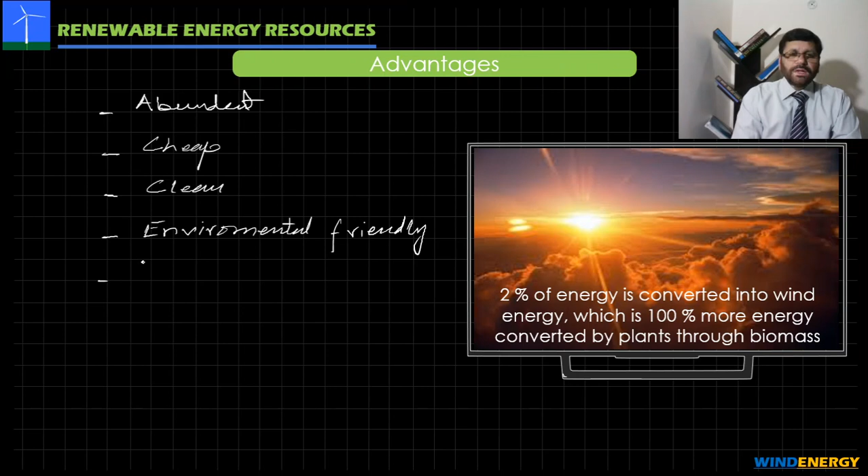Then it is cheap, you don't have to pay the recurring cost. Then it is clean energy and environmentally friendly, causing no pollution. However, one of the limitations, that is initial cost, is very high.

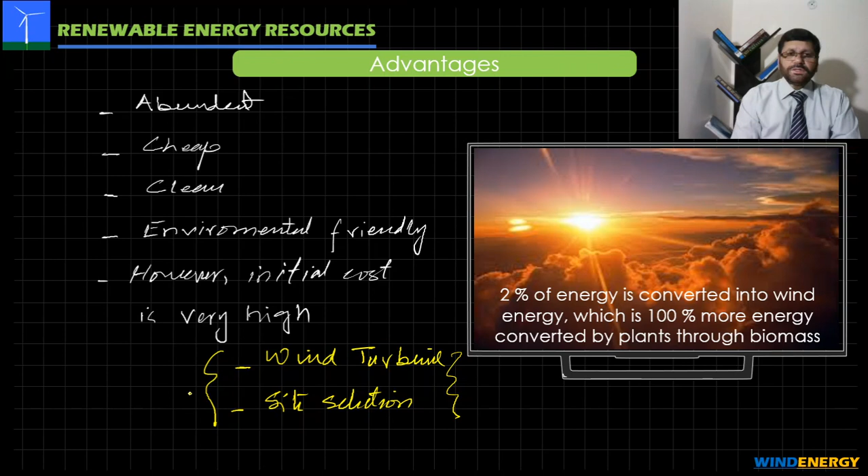And this initial cost is in the form of the manufacturing or making of wind turbines, and the cost associated with the site selection for the wind turbines. So this is very high, after that it is cheap. Now few environmental concerns in that. The first one is that

electromagnetic interference. It disrupts the frequencies of TV and radio waves. So this causes the disruption, that is electromagnetic interference. Then is the noise, which is produced because of the rotating components of the wind turbine itself, the drive chain and the generator that is part of the wind turbine.

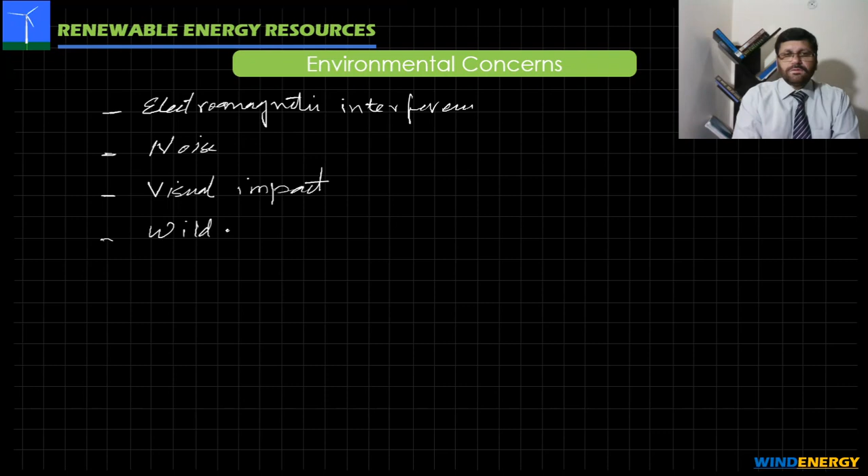Then is the visual impact, where the turbines are installed near the population, so the people feel that these are going to deteriorate the landscape of that very region. Then is the wildlife, that is killing of birds,

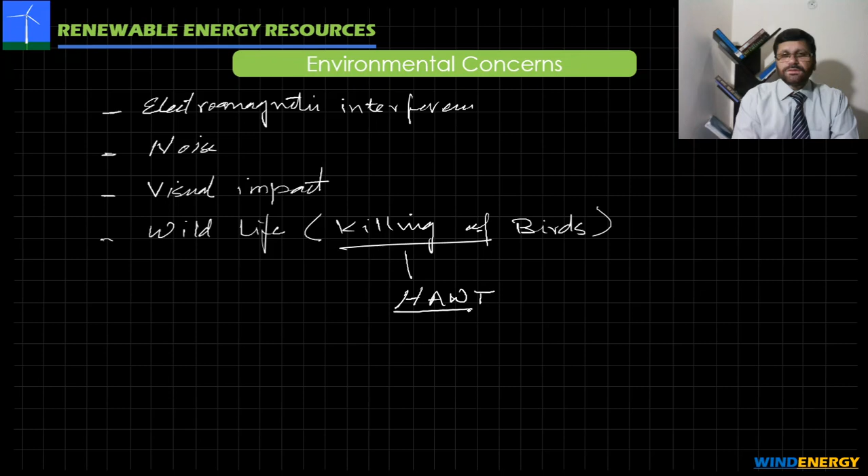and this is more associated with the vertical axis wind turbine. Sorry, this is more pronounced for the case of horizontal axis wind turbines, which we are going to discuss soon. Now,

wind drivers. Above the earth's surface, in the atmosphere that is present, these are known as the geostrophic winds, and here the temperature differences and pressure differences cause the wind to blow, the air that is moving. So we will look one by one. The first one, that is uneven heating of

the earth. The sun energy falling on the equator at 0 degree latitude is much more as compared to the North Pole and the South Pole. So what is happening? The air present on the equator warms at a much faster rate, and then because of the low density it moves upward. And after moving upward, it is going towards the North Pole and the South Pole. So this is one of the reasons for the blow of the wind, the wind driver.

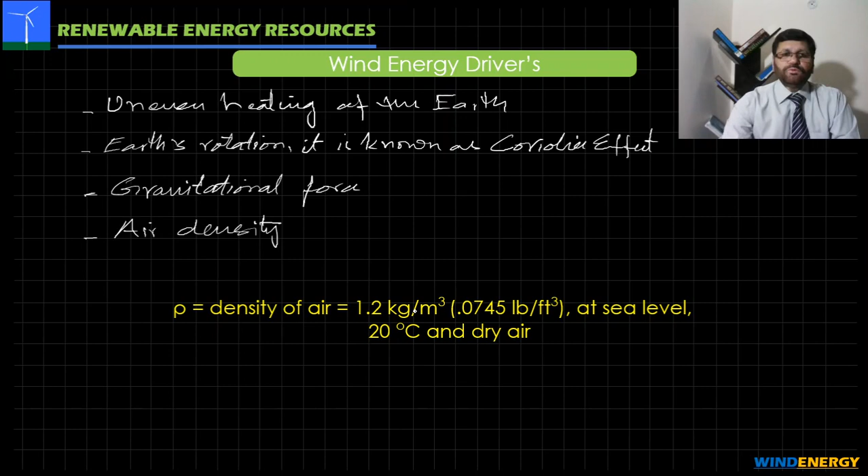Then there are the inertial forces. As we know, the earth is moving in its fixed orbit around the sun, so because of the attraction of the sun there are some inertial forces, so that is also causing the force.

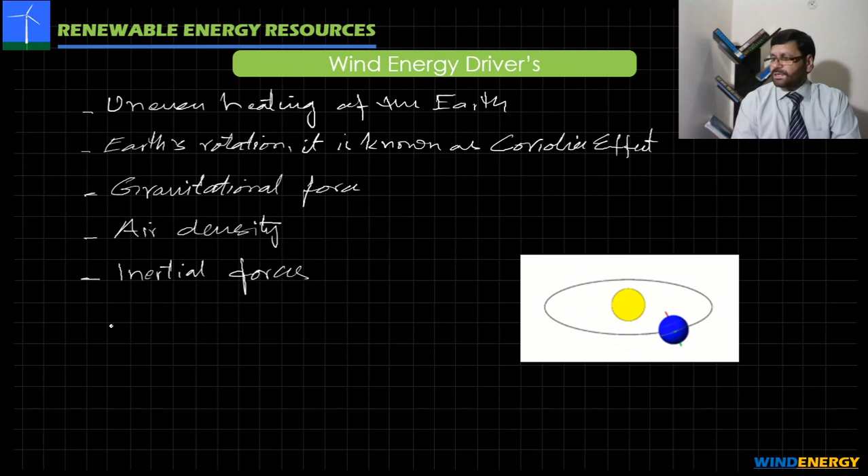Then we have the weather phenomena. We have seasons like summer, winter, spring, autumn, and because of that there is a seasonal effect, and due to this seasonal effect, the wind direction as well as the velocity, the speed, is going to differ. So this also causes the movement of the wind.

Further, the surface effect. Surface effects. In that, the first one is the topography: the terrain or the landscape of the very location which is under consideration. So this is going to affect the wind movement.

Then the mountain effect. In mountains during daytime, since the masses get warm earlier, the wind warms up and moves upward, and during night hours it tends to move downward.

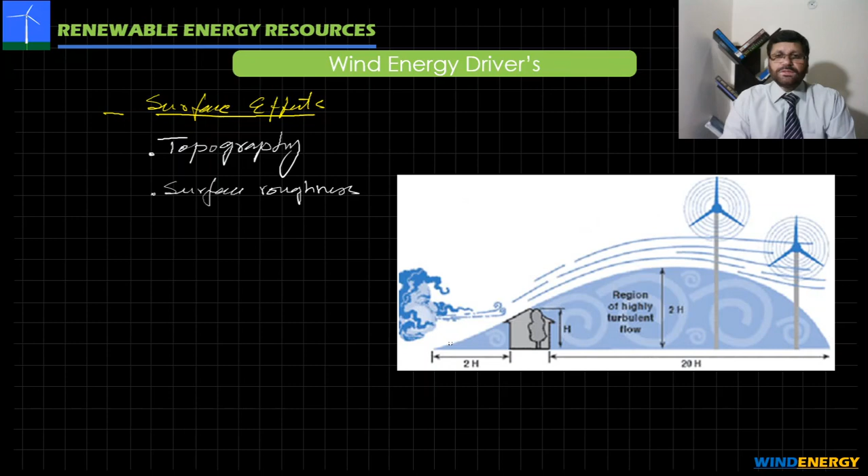So we say that the surface roughness at sea level is 0, and the surface roughness on the roads, on the runways, is going to be 0.5, and likewise for the built-up area this is going to vary. So this is the surface roughness that hinders the flow of the air, and air is going to move at a much slower velocity after striking these objects present on the surface of the earth.

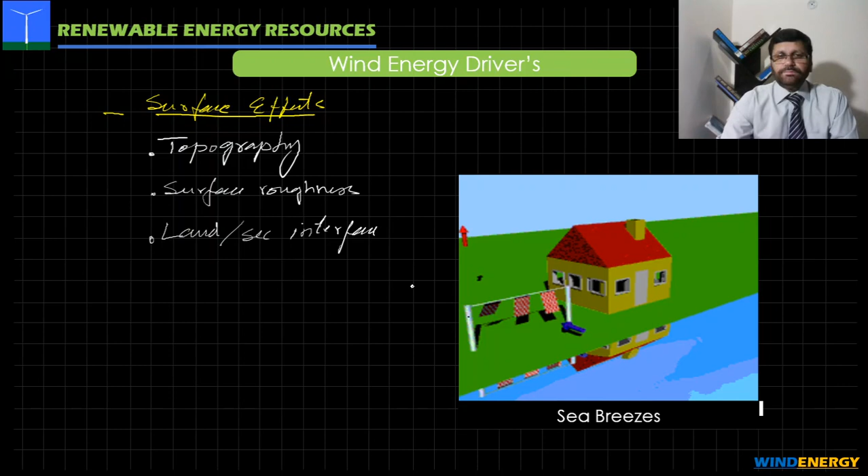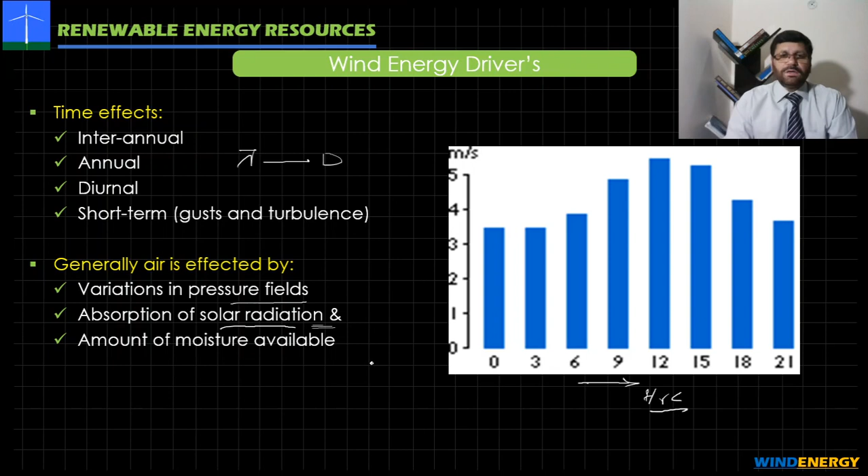Overall, we can say the air is affected by the variation in the pressure fields, caused by uneven temperature and many other reasons. Absorption of the solar energy will depend on the objects, the masses present on the earth, and then the amount of moisture available in that region. Then, overall, for the statistical analysis we have to get the wind data for the analysis, that is, the average horizontal wind speed over a specified time interval.

Then the variations in the horizontal wind speed, then the average horizontal wind direction. Because if you have at any location, let's say if I mark this location like this is north, south, east, west. Now this is going to indicate the direction of the wind at any point in time, what is the direction of that very wind. So wind direction and the wind's velocity, the speed and duration of distribution.

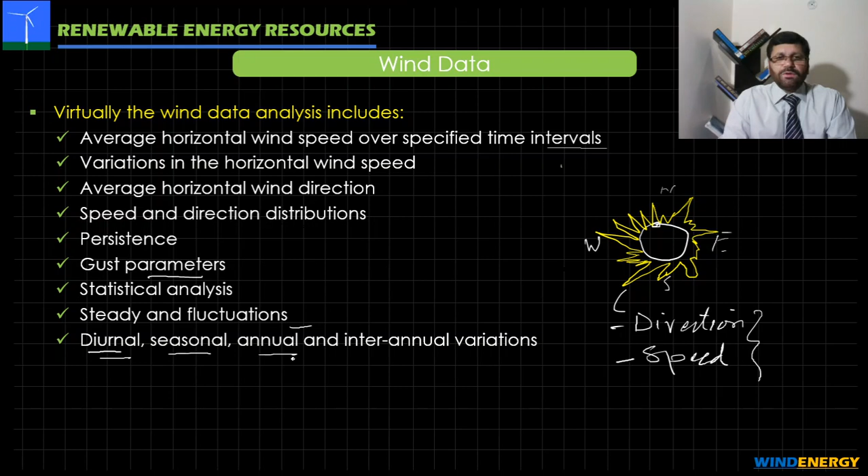So this is going to give us the distribution and, you can say, the direction as well as the speed of that very wind. Then the gust parameters, then statistical analysis on the basis of these measurements, then steady and fluctuations that we are going to expect, and overall these are going to be calculated on the basis of day and night, seasonal, annual and interannual variations.

Now these are the few instruments which we use for the measurements of the wind. The first one is the anemometer. The anemometer is going to measure the velocity of the wind, and it is very important that we place that anemometer at the location of the hub of the wind turbine. Let's say we have a 3-blade wind turbine, and roughly as a thumb rule, the height of the turbine should be 3 times the radius of the rotor, or you can say the radius of the blade.

Let's say if the blade length is 40 meters, so 3 times means we have to install this turbine 120 meters from the ground. So we have to place that anemometer at 120 meters from the ground. Then we use wind vanes.

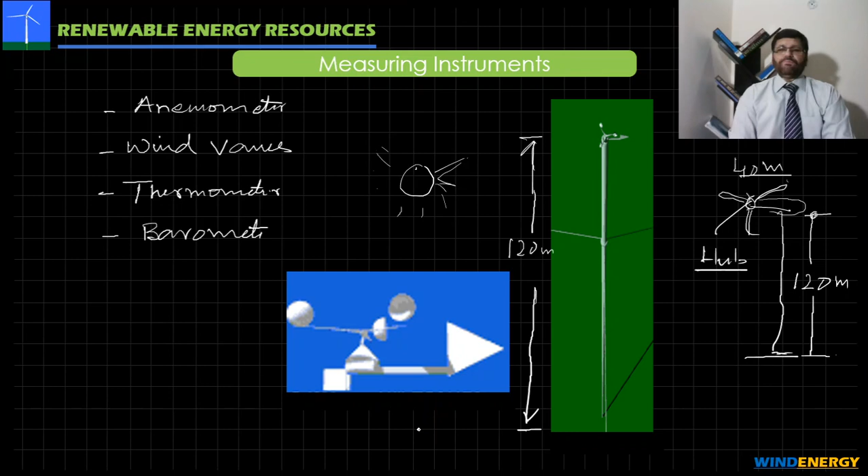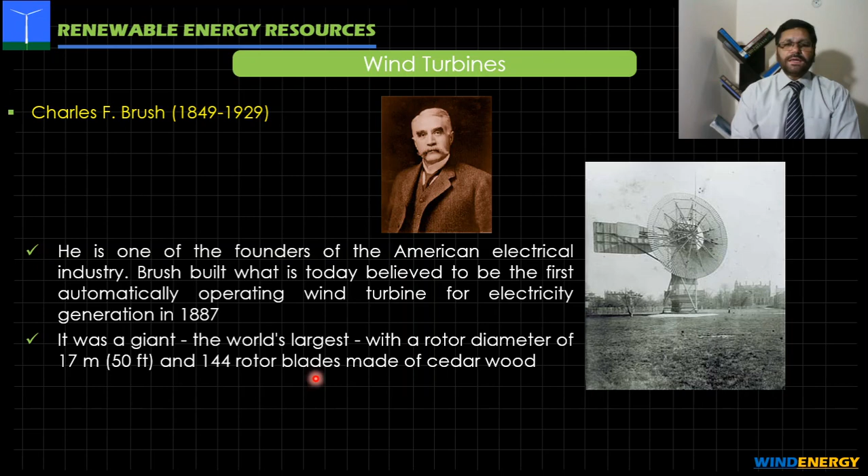In this session of wind energy, we will discuss various types of wind turbines. Charles F. Brush is considered to be the founder of wind turbines. He was also a founder of the American electrical industry. He built his wind turbine with 144 blades, and the diameter of the rotor was 17 meters. Another, Poul la Cour, is also considered one of the pioneers of modern aerodynamic wind turbines. He was actually a meteorologist, and he built his own wind tunnel for experiments.

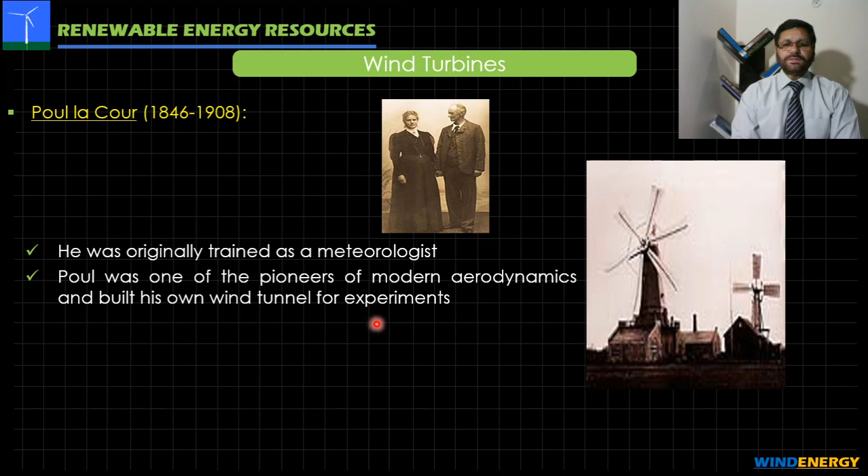Working principle of wind turbines: the kinetic energy in the wind pushes the turbine blades, and in turn the turbine blades rotate, and at the end we generate power. Wind turbines produce electricity in 2 steps. First, conversion of the kinetic energy of the wind into rotational energy by the rotor blades, and then conversion of rotational energy into electricity by the generator.

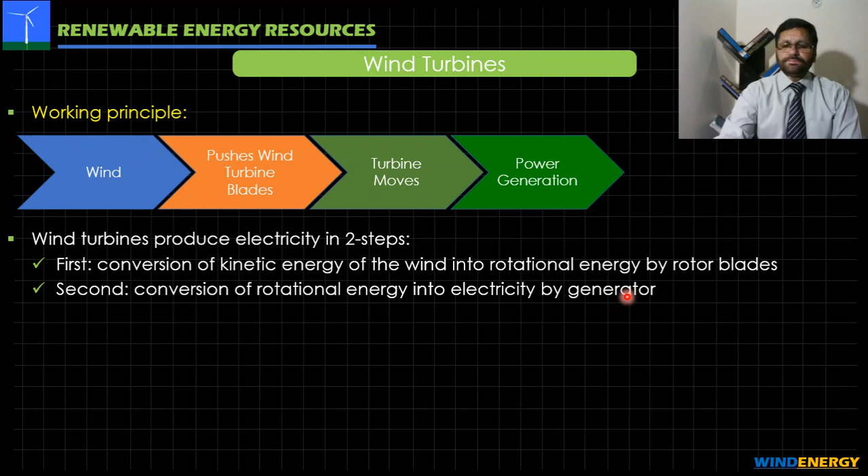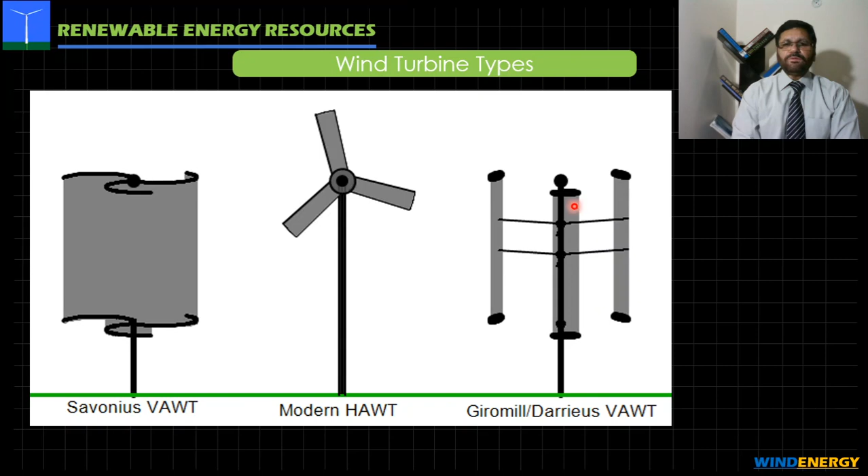Now these are the types of wind turbines. This is the horizontal axis wind turbine, and we have 2 further types: the Darrieus vertical axis wind turbine and the Savonius vertical axis wind turbine. In Savonius vertical axis wind turbines, the rotor blade starts from the center and goes towards the end, and in the Darrieus vertical axis wind turbine, the rotor blade is away from the axis of the shaft.

Now the vertical axis wind turbines. This is a type of wind turbine in which the axis of rotation is perpendicular to the wind stream, and it works like a classical water wheel, in which the water arrives at a right angle to the rotational axis of the water wheel. Further, we have two types of vertical axis wind turbine, the Savonius and the Darrieus vertical axis wind turbine.

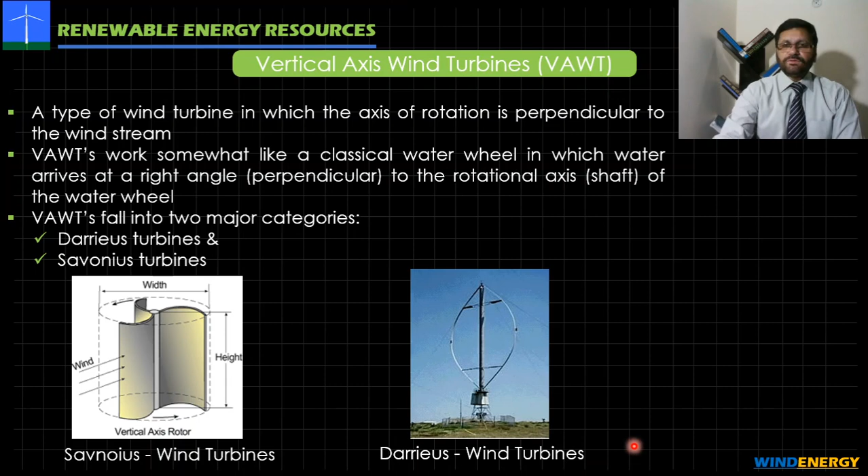And the advantages of the vertical axis wind turbine: it has its rotor shaft installed vertically and can therefore work even if the turbine is not pointed directly towards the wind direction. Let's say we have a Savonius type; the freehand drawing is not too good. And this rotor is connected with this shaft to the ground.

Now irrespective of the direction of the wind, this rotor is going to operate. So this is a big advantage of this vertical axis wind turbine: no direction keeping is required. Then it ensures wind power even in areas where there is low wind speed. Actually it operates in low wind speed. We will discuss later why this is used in low wind speeds.

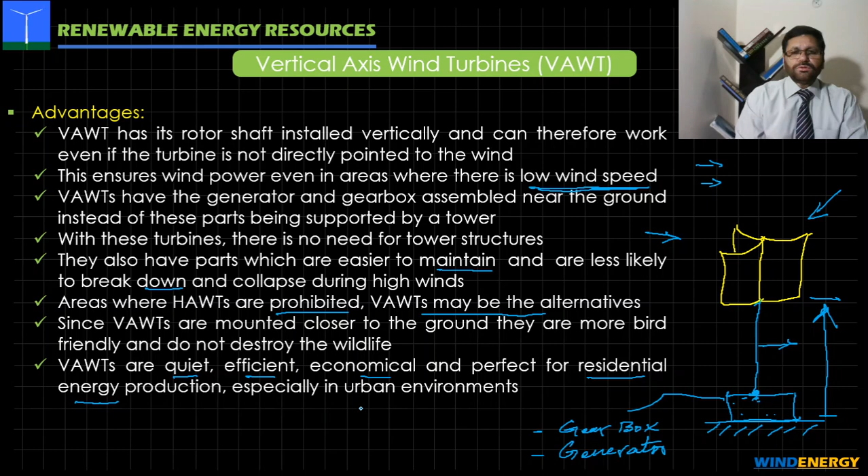Vertical axis wind turbines are quiet, efficient, economical, and perfect for residential or domestic energy use. So you can use these vertical axis wind turbines in built-up areas. The disadvantages: they are 50% less efficient than the horizontal axis wind turbine. So this is a big disadvantage.

Because of no tower structure, the full advantage of higher wind speed cannot be gained. So again, because of the limitation of the shaft, for vertical axis wind turbines you cannot go very high. They require energy to start. So starting energy or starting torque is required for running this. It is not going to operate automatically, so initially you require a starting torque.

And they have parts which are difficult to change without dismantling the entire turbine, since the gearbox as well as the generator are under this shaft. So if there is any malfunctioning in the generator or the drive chain, the gearbox, you have to dismantle the entire turbine and then you can rectify that. They require wires to hold the structure.

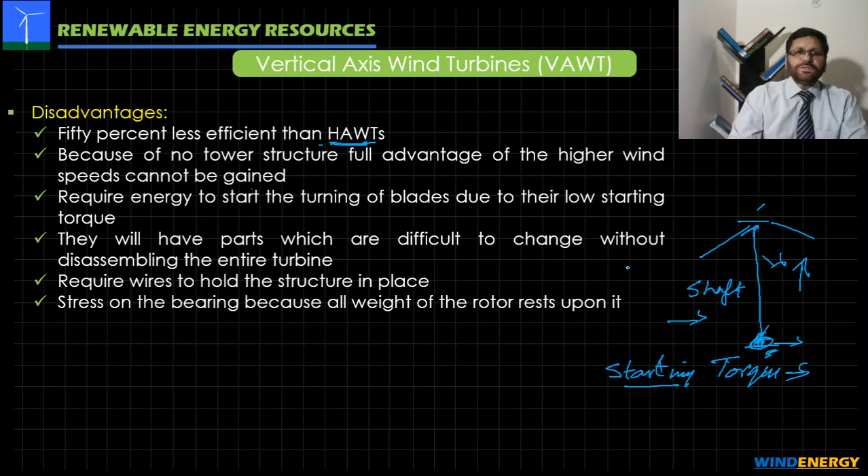Then stress on the bearing, because the entire weight of this rotor as well as the shaft has to rest on this bearing. So these are a few disadvantages of vertical axis wind turbines.

Then the horizontal axis wind turbine. The horizontal axis wind turbine is the common style that most of us think of when we think of a wind turbine. Automatically, once you think of a wind turbine, this is the turbine which comes to mind. The horizontal axis wind turbine design is like a windmill of the past; it has blades that look like a propeller.

On the horizontal axis, the dominant driving force is the lift. If you have a blade like this, the driving force is going to be the lift. The three blade turbines operate more smoothly and are generally more quiet than two bladed wind turbines.

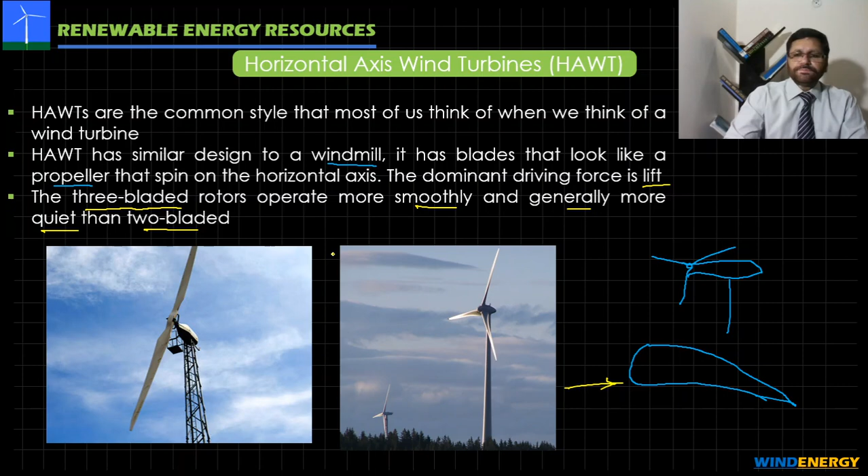Further, most horizontal axis wind turbines built today are three blade wind turbines. Although some have fewer or more blades, the ideal is three blades. We will discuss later on why the three blade wind turbine is more efficient and economical.

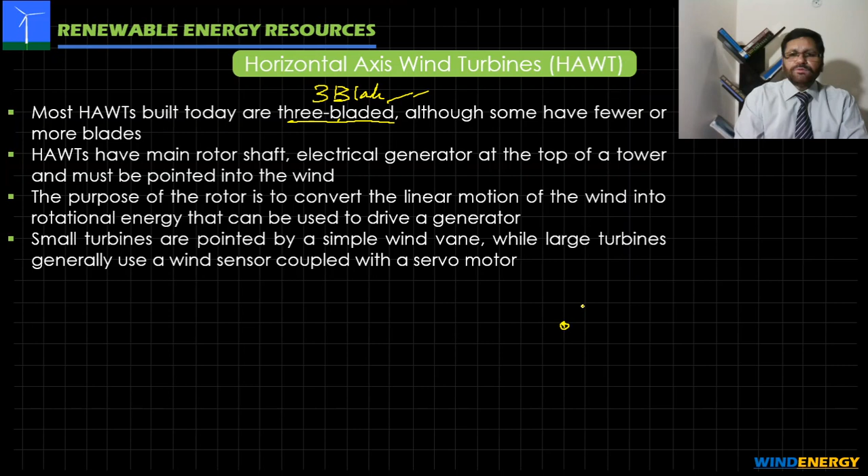Horizontal axis wind turbines have a main rotor shaft and electrical generator. So in this wind turbine, let's say we have a three blade wind turbine, and here you have a drive chain, the gearbox, connected with the generator, and we have a tower.

The shaft and electrical generator are at the top of a tower and must be pointed into the wind. So there is a limitation. You have to keep the face of this turbine toward the direction the wind is coming from. So this is the wind direction, and it has to be facing like this.

The purpose of the rotor is to convert the linear motion of the wind into rotation. So the kinetic energy is coming, and this rotor converts this linear energy into rotational energy and then drives the generator. Small turbines are pointed by simple wind vanes. We will discuss later that we use a wind vane for direction keeping, so that the rotor faces the incoming wind.